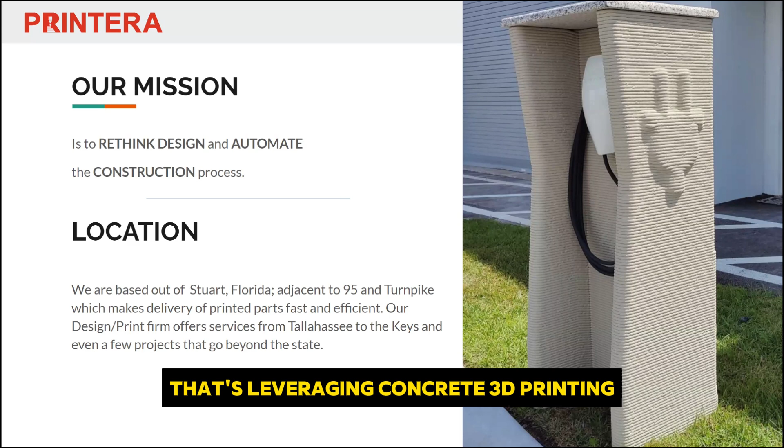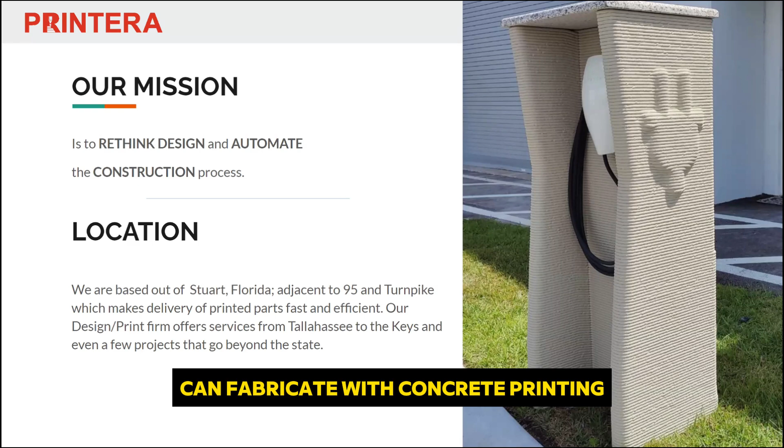As he mentioned, we're also located here in South Florida, so we're serving the entire Florida market. Projects, at least in housing, we're willing to go just about anywhere in Florida. And then, as you'll see in later slides, for projects outside of housing, we serve clients nationally. There's a lot of different interesting elements—even in this image you can see an EV charging station as just one example of something we can fabricate with concrete printing.

A little bit about ourselves and the background: we're in a very early, new, blooming industry. Even though we've only been around for about 3 years at this point, we're able to pretty much call ourselves veterans of this industry, just because of how new it is and how few players are currently operating in the space.

Over the course of that time, in combination with Centerforms, which is a company I acquired last year, we have a couple of interesting accolades. We did print the first permitted residential project in Florida, up in Tallahassee. I have a whole slide dedicated to that, and we'll explain a little bit more.

We engaged in a pilot project with the U.S. Air Force at Tyndall Air Force Base. We participated in the world's largest 3D construction printed building, which presently sits in Wellington, Florida. We'll see how long they hold that title, because there's some other stuff happening globally, so it's something cool to keep our eye on.

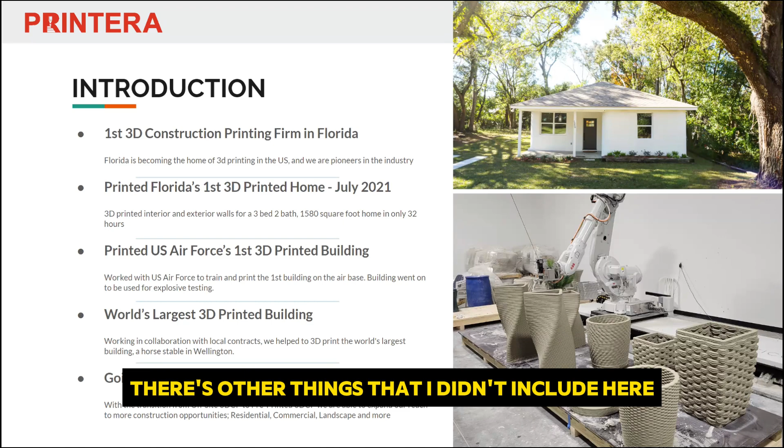Going beyond residential, there are other things I didn't include here, but we did deploy the first artificial reef in Florida, and we were able to do some commercial projects, like Florida's first 3D printed bar in Tampa that we produced. A couple other interesting elements as we go, but that's just a little bit about our background.

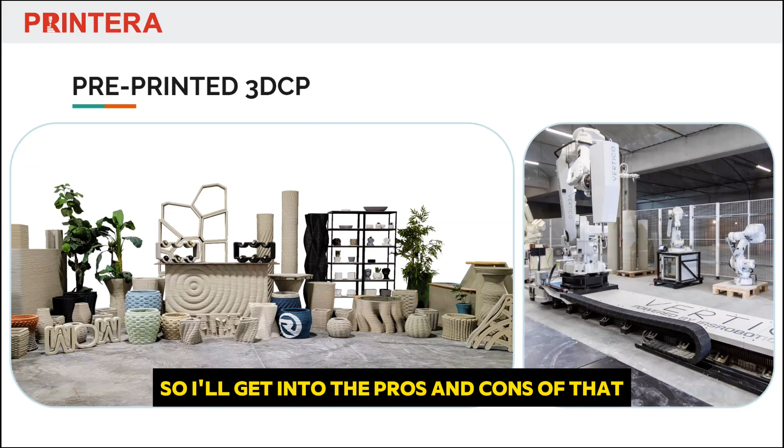What we're doing that's different from others is we're calling it pre-printed 3D concrete printing, which essentially means all the items you see in this image, as well as housing modules, we produce in a controlled facility in one location here in South Florida, in Stuart. What's important about that is we're not lugging a giant piece of equipment to a construction site and contending with all types of weather conditions and site-related hazards and delays. When you get your 5 o'clock rain shower in Florida, that's pretty typical—we're immune to that hurting us too much, unless of course the power goes out or something. Nevertheless, we have a little bit more longevity in our print cycles because of being in that controlled environment. I'll get into the pros and cons of that in the next couple slides, but that's the real key differentiator.

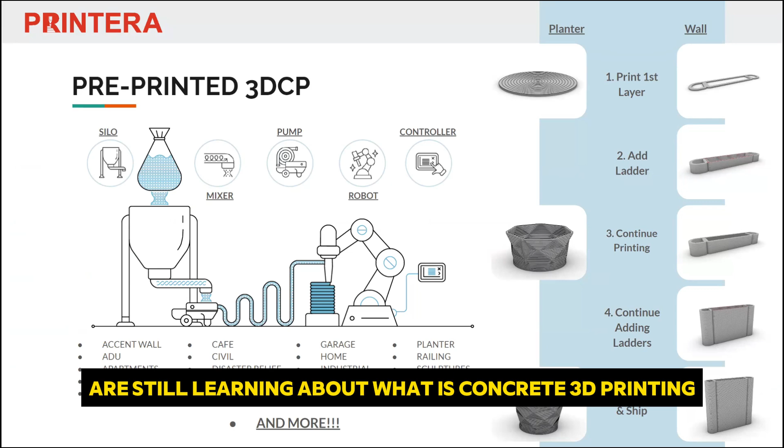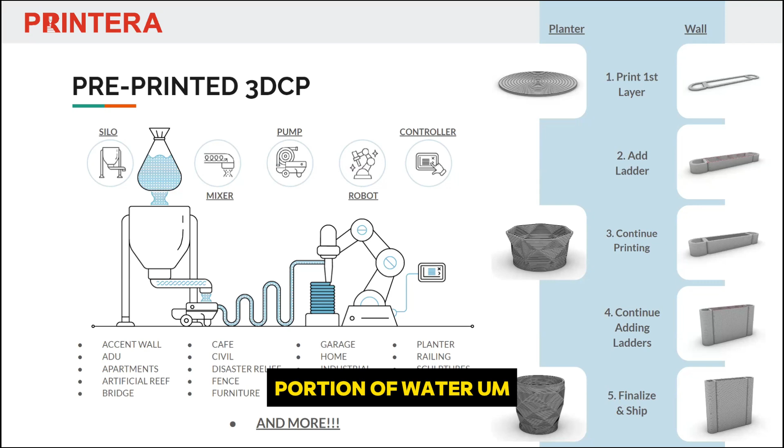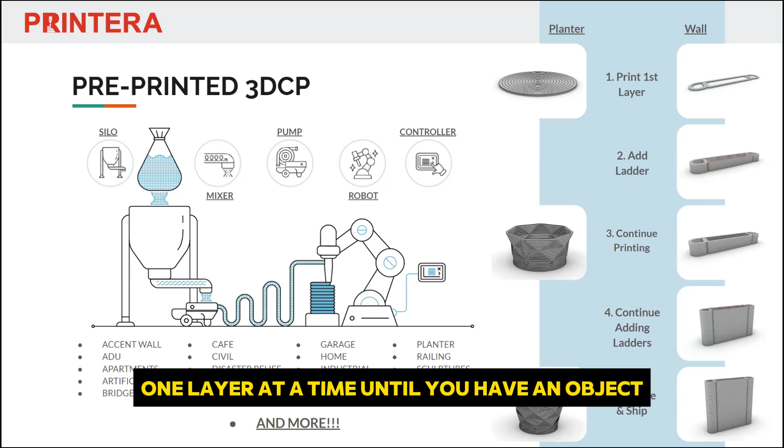I like to start at a high level because a lot of people are still learning about what concrete 3D printing is and how it works. At a fundamental level, it works the same whether you're using a system like mine or one erected on a construction site. Essentially, you're inserting a dry material mix—in our case, dry concrete—which is dosed with a fairly accurate portion of water until you get a pumpable slurry. The slurry is pumped through a hose over to a robotic extruder, and the extruder lays down the concrete one layer at a time until you have an object. That object could be something as simple as a planter or an entire wall segment for a house—it all depends on the scale of the machine and the capability of the material you're printing with.

One of the things we really pride ourselves on at Printera is bringing automation not only to the construction printing process itself, but also to the design. We do as much design algorithmically as possible, which means we can iterate on a design in seconds instead of having to go back and re-render items from scratch. Once we have a render, it converts into robot code, and that's what allows us to print.

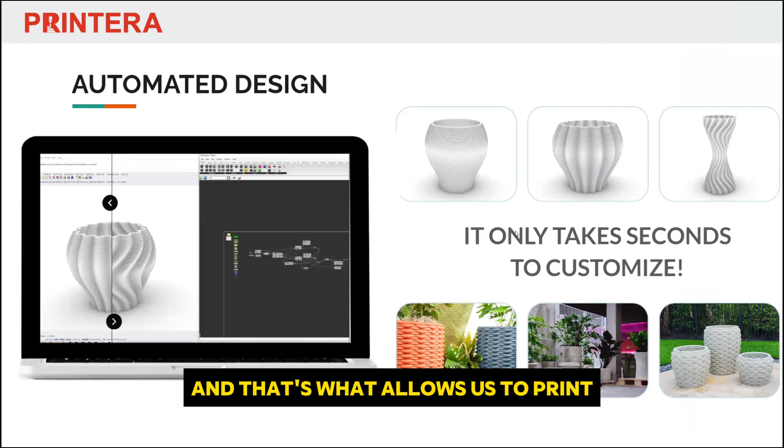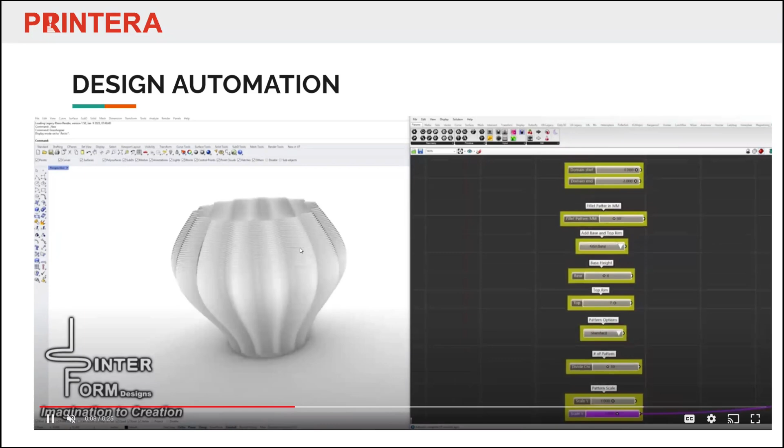I don't think the audio needs to carry through, but just demonstrating in real time this software we've put together on the back of Rhino—if a customer were interested in designing a planter, for example, we can change the pattern and the size in real time by just modifying a couple parameters. That same code can apply to wall modules, columns, you name it. It can be done procedurally and in real time, which is a fun element especially when interacting with potential clients who say, 'I like what you put forward, but I wish it was a little different in this particular way'—and we can do that very quickly.

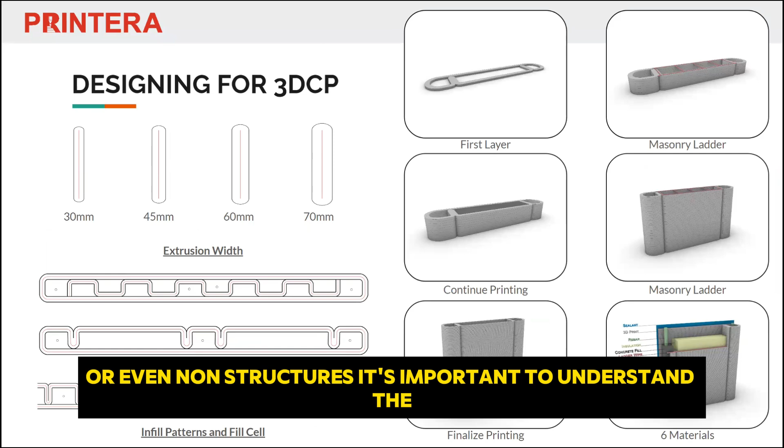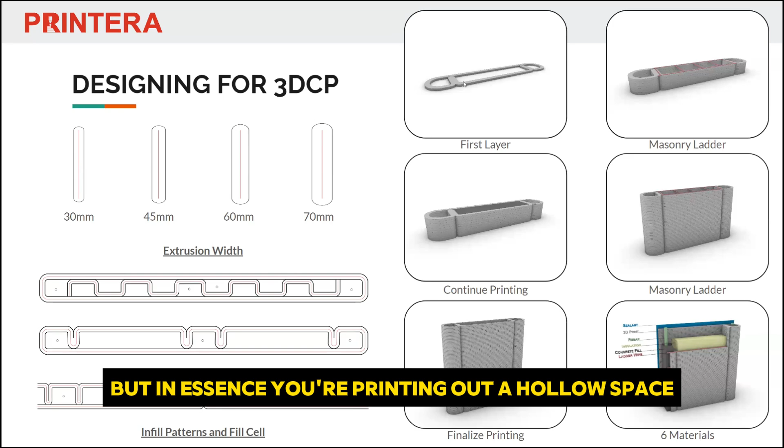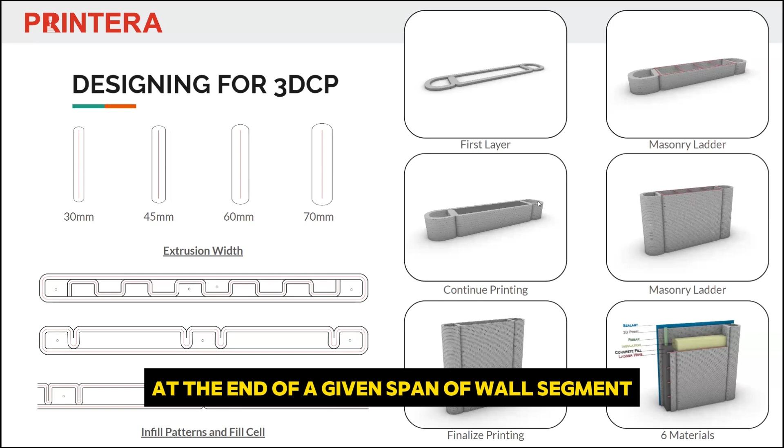The structural element actually comes from filling of cavities that we're creating over the course of the print. So in this example, at the end of a given span of wall segment, you have a cavity, and that cavity has rebar dropped in, then it gets backfilled with concrete.

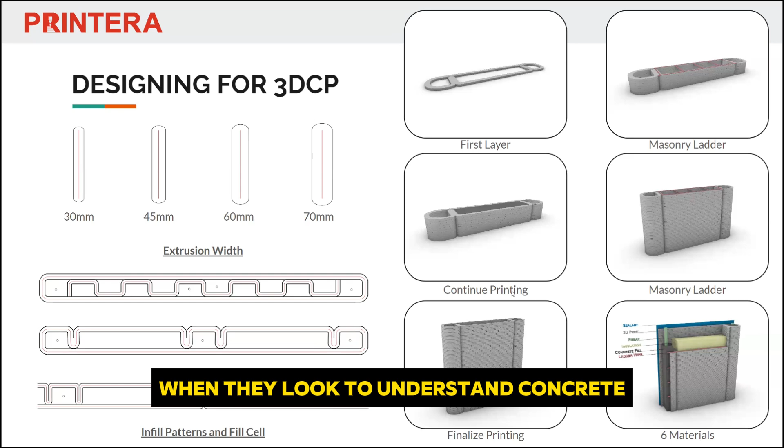That's what's going through the structure. That's what the permitting boards, townships and counties are looking at when they look to understand concrete 3D printing in construction applications. Now, the area between the void, you can go multiple different ways with it.

You can fill it completely with concrete and live in a complete bunker, or you could fill it with insulation, or fill it with all of your utilities and pass-throughs. So that's where the interesting nature of 3D printing comes into play.

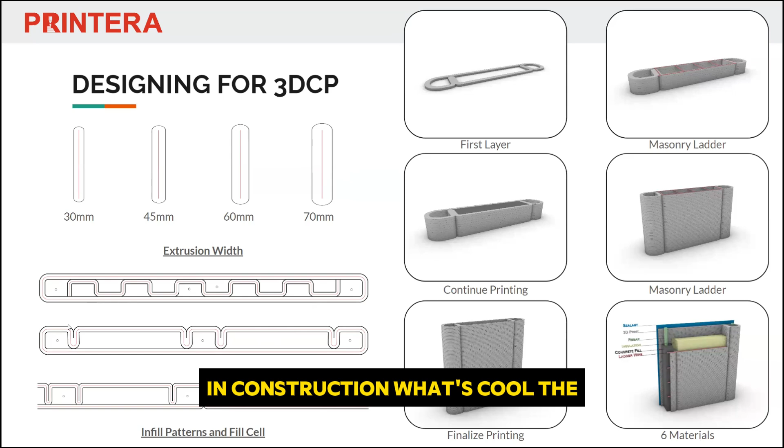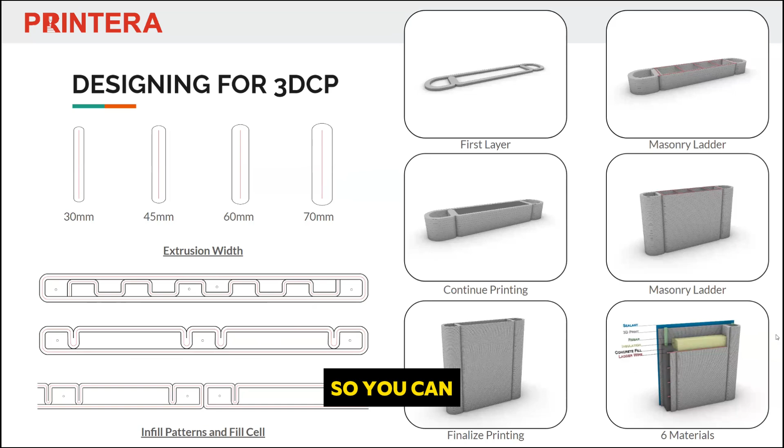Even though the examples you're seeing on the screen show straight walls, because that's what a lot of people understand in construction, what's cool to envision is that all of these elements can be done in any shape. As we go through the deck, you'll see we've done one wall segment that had a curve in elevation as well as in plan.

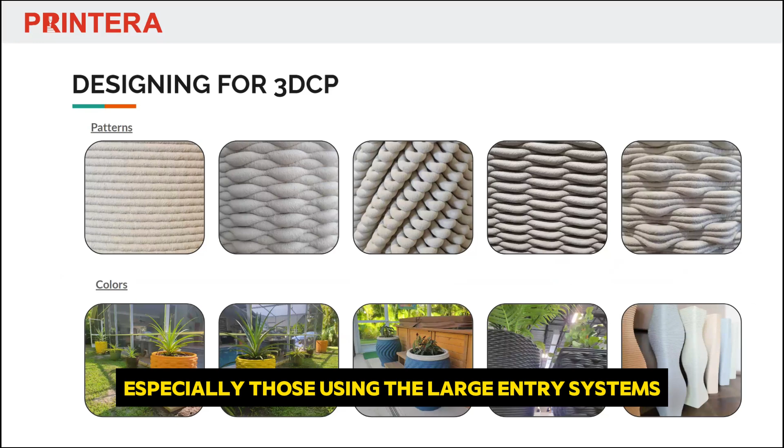And then the other element is just the aesthetic value. This is one area that we're setting ourselves apart from a lot of companies in the industry, especially those using large gantry systems, because we're using a robotic arm in a controlled environment, we have a lot of quality control. Over the course of a print, we're monitoring 17 different metrics in real time to adjust if conditions change, even in the warehouse, or recognize any issues that might be occurring before they make their way into the ultimate print.

So here you're seeing patterns as an example, right? Whether it's straight line, which is indicative of most concrete printing, or you can do things like weaves and loops and different elements like that.

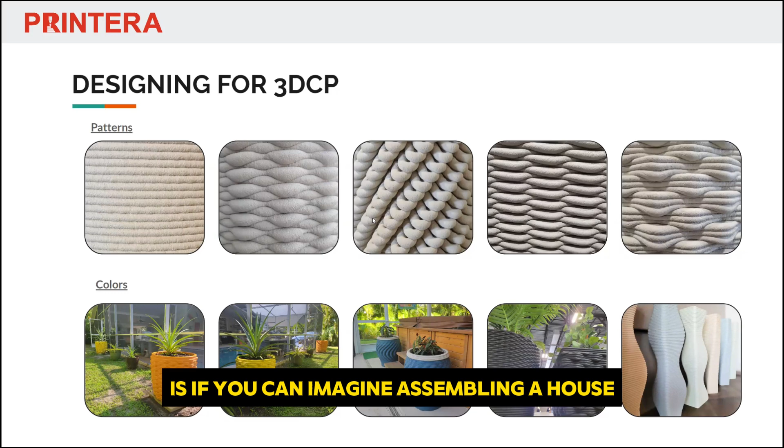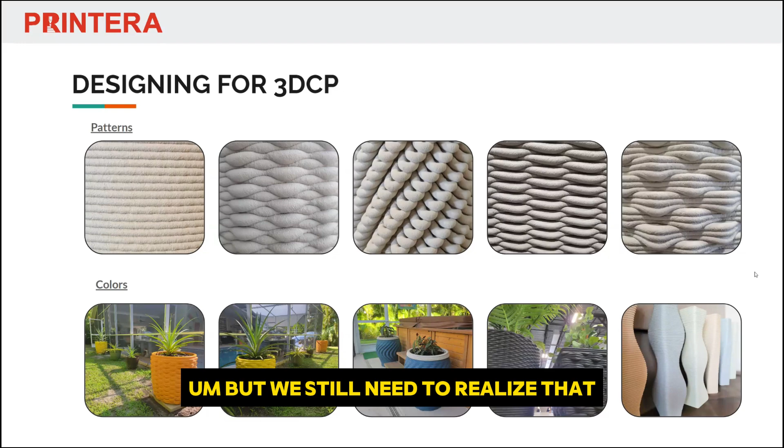And where that really comes into play in construction is if you can imagine assembling a house where you have this pattern on the outside, you can now take stucco out of the equation of the house. If you spend a marginal amount of difference in material to create a little extrusion and that pattern, versus having a stucco team come cover the house completely with stucco, there is a savings element here, but we still need to realize that in the broader scheme of the grander picture.

Back to explaining how we work from a pre-printed standpoint. Again, this is part of that world's largest 3D printed project. We did all the columns for that job, and I like the way this came together to show the timeline of progression.

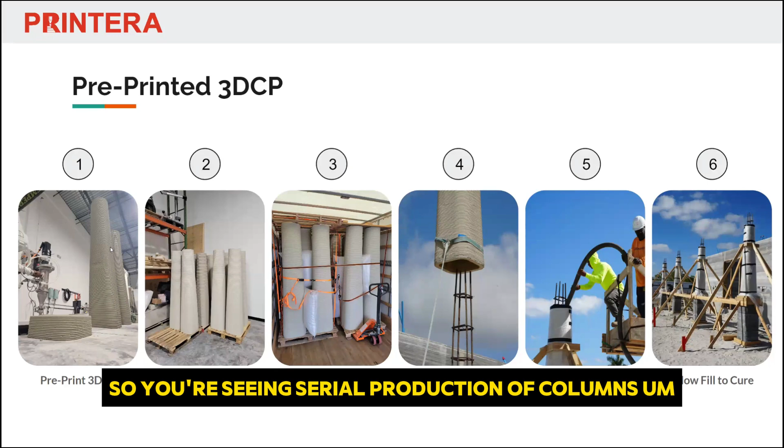But basically, we produce in the warehouse, so you're seeing serial production of columns. They have to cure, any concrete element needs to cure, whether it's precast or 3D printed. Our curing is a little bit accelerated, we tend to hit about a 3,000 PSI strength within 24 hours. So for something like a column element, it could ship same week or early the following week. It gets delivered to site, and at that point it's in the contractor's hands.

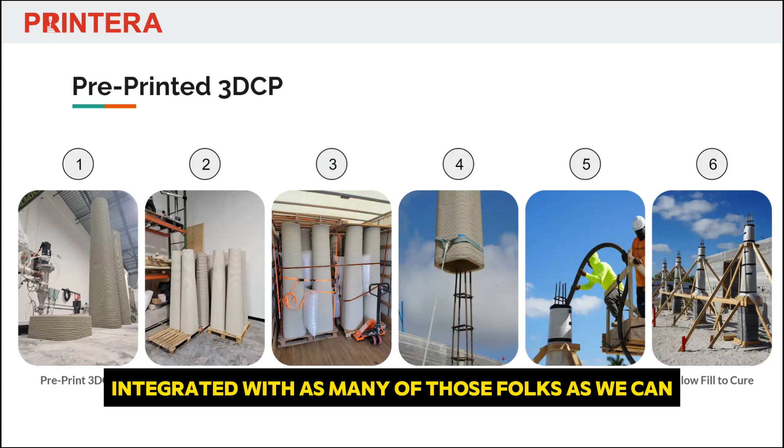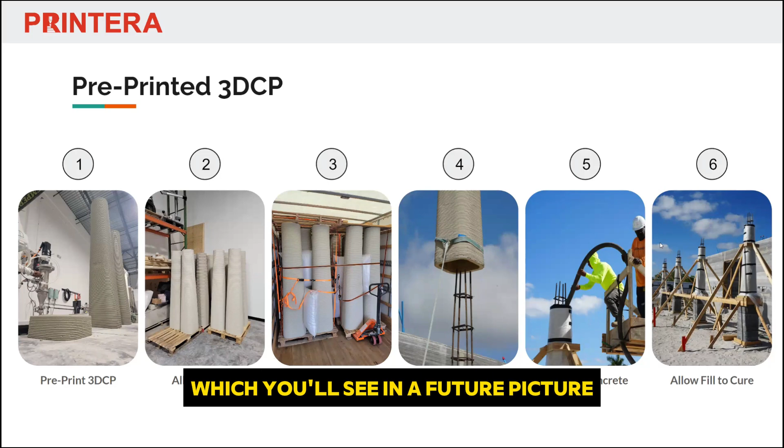So we're a building material supplier, we're not general contractors and we're not installers. We want to get integrated with as many of those folks as we can. But the great thing for them is that the installation of these columns becomes very simple. They drop it over a rebar cage, backfill it with concrete, and now you have a structural column, which you'll see in a future picture is now holding up the bond beam of this particular building.

Hey Justin. Yep, for us, I guess contractor or construction folks...

What's the difference between a CBS strength wise from just a regular CBS construction and what you're talking about? Because if I heard correctly, you're in the thousands for density. So I'm not exactly sure, but my understanding is that's a significant difference.

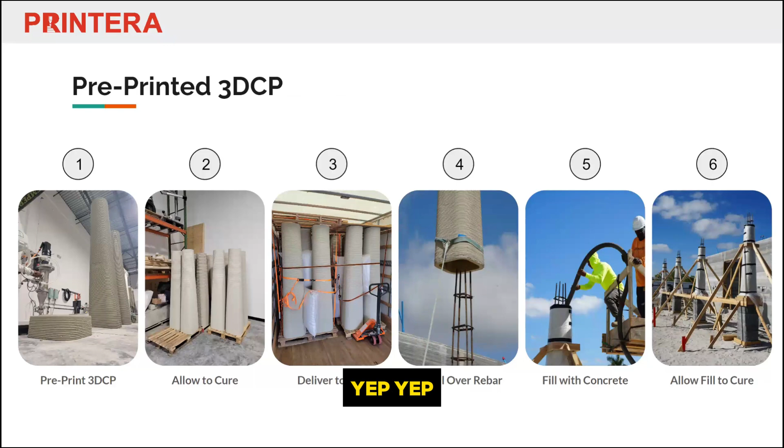Yep, absolutely. So CMU block, that's our building material of choice in Florida. It tends to come in somewhere between 2,000 and 2,500 PSI compressive strength.

So very key is its compressive strength. Whereas the concrete that we're using that's designed specifically for 3D printing comes in anywhere from 5 to 7,000, depending on how much accelerant we hit it with. So you are talking at least a 2-time strength, 2 times over in strength from what a block would be.

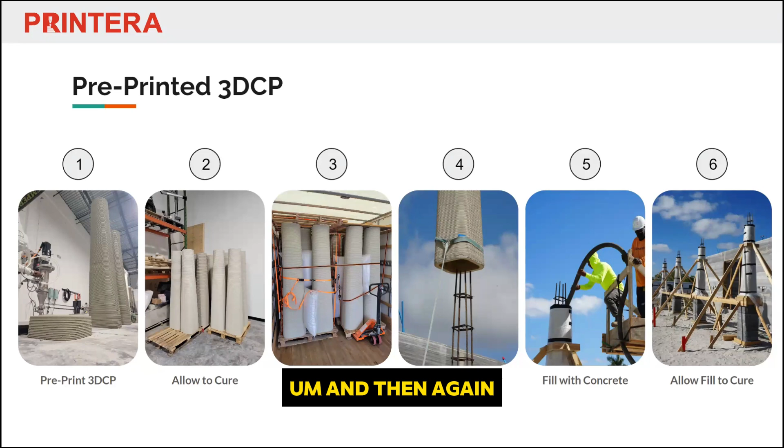And then again, the structure of your house comes from filling those cells. So when engineers are looking at it, they care more about the fill cell, right? And what you're dumping into that, making sure you've got the right rebar gauge and everything in there. But it's still nice to know that the overall structure of the house, all the aesthetic elements and what are making up your walls, is stronger.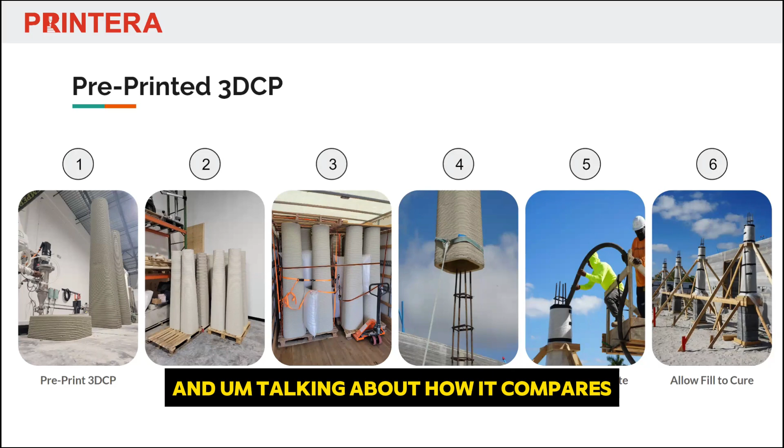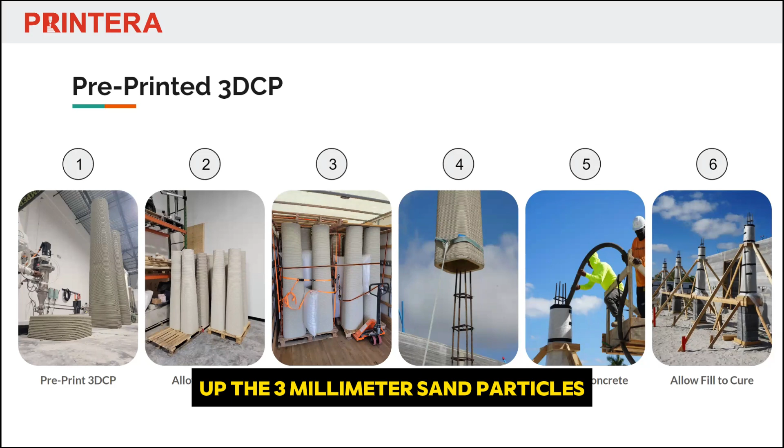And talking about how it compares to block, the concrete that we're using is actually very dense. So there's no large aggregates in it. The largest aggregate in the mix is the sand particles themselves. I've seen some mixes with up to 3 millimeter sand particles, but that's about the largest you'll ever see. And so you can imagine if you took a piece of this concrete and broke it and looked at a cross section, you'll see a very compacted, very dense piece of concrete.

And that's also very good for resisting water permeation. So if you're still doing construction with traditional rebar modules, for example, with that thicker, more dense concrete, you're giving it some more longevity because water shouldn't be impregnating the concrete.

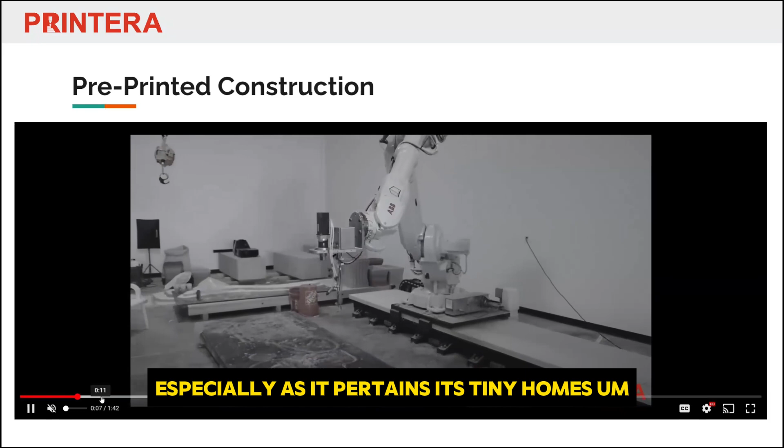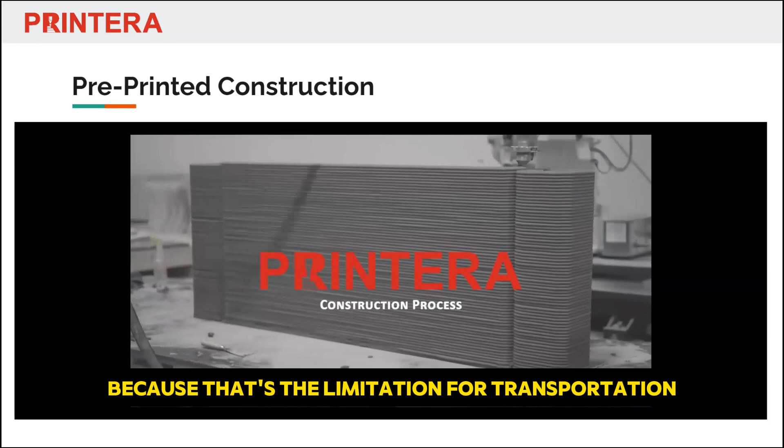Just to illustrate very quickly what an overall construction project looks like for us. As we mentioned, especially as it pertains to tiny homes, we print the wall module in our facility, which is what you're seeing here. So we do them in panels up to 8 feet long, and then we can go up to 10 feet tall because that's the limitation for transportation. We generally like to go a little smaller, and then those modules get brought to the construction site where there's already a cured slab with exposed rebar ready to receive the modules.

So think of a general contractor, instead of ordering up 6,000 blocks to make a house, they'll order up like 15 wall modules, and a telehandler will drop them into place, and the whole thing will go together in about a day for something as small as a tiny home footprint.

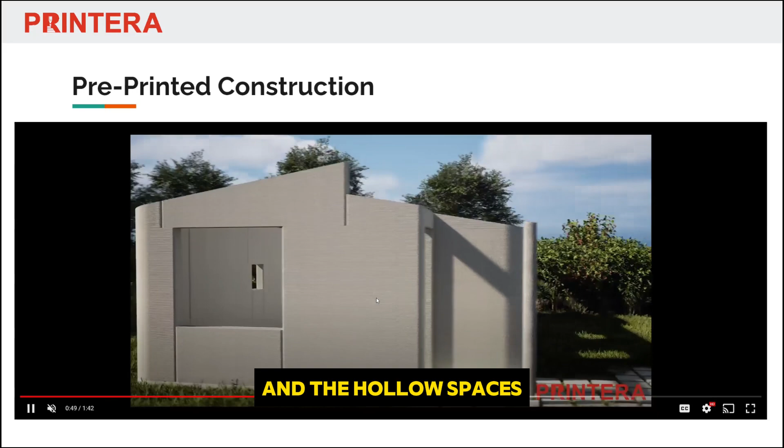And then here you're seeing that the cells get filled and the hollow spaces. And then what we're also often asked, and you'll see its inclusion in this video, is, well, what if you don't like the look of the 3D print layer lines? And you want something more traditional, particularly on the inside of the house, where people are used to having drywall. It works just like block.

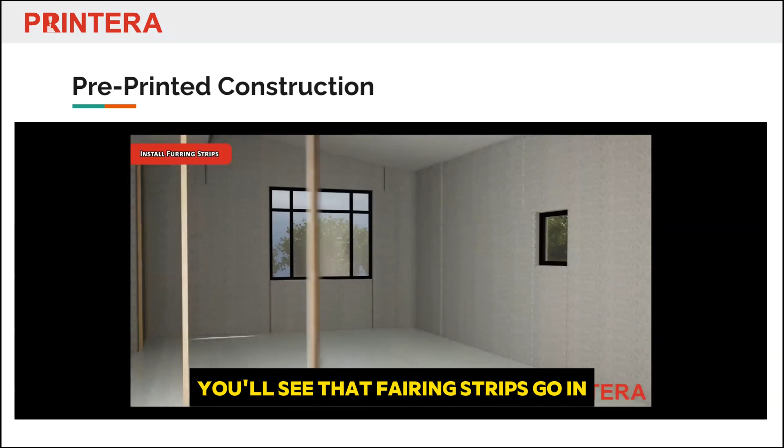You'll see that furring strips go in, which is what you're seeing now. And then with the furring strips, you could run utilities on the surface instead of through the cavities. That gives you another element of flexibility.

Your insulation, and then you finish it off with drywall. And if you didn't know any better and you were standing inside a house that was finished that way, you wouldn't know it's 3D printed. So you've got a lot of flexibility on either end. You can go extreme 3D printing and save some money and just have different layer lines exposed on the inside of the structure, or you can go crazy and stucco the outside and drywall on the inside. So it really gives you a lot of flexibility.

That design, Justin, is about 750 or 800 square feet. Yeah, so that design is actually for a tiny home printing company in Minneapolis. So that is their design. They designed it 850 square feet, I believe that model is. And you may be right, it might be 750. I got to take a look at their inventory. But yes, that essentially is what that is. It's 2 bedrooms. And you can find a lot more information about that.

Another element that Ray touched on that we think is important is what's our environmental impact as we use this material. Concrete gets a very bad rap internationally, just because it is the world's most, or second most, used construction material. And I think it only falls in second place when people consider water as the first.

So what you end up with is a lot of negative press on how this impacts the environment. But the reality is, when you look at it on an individual basis as a material versus any other material, it's not that far off, right? Something like wood frame, or if you want to use any other method, outside of like pumping clay and rammed earth.

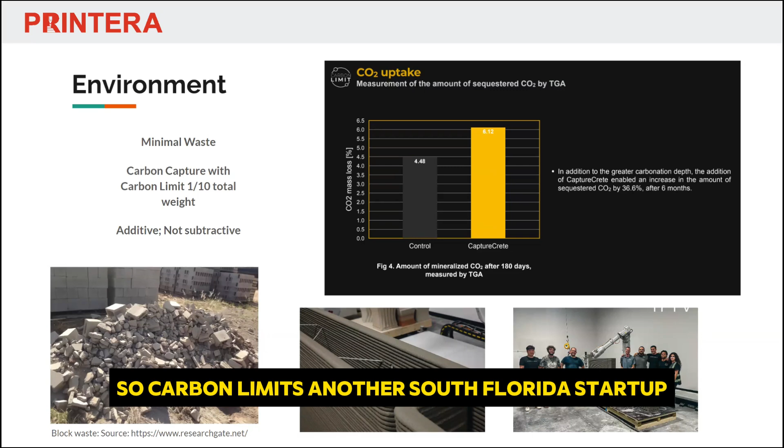Now, Ray alluded to this a little earlier, and this is something we're very excited about, but we piloted an additive with Carbon Limit. Carbon Limit is another South Florida startup, and they came up with an additive that goes into the Portland cement, into the mix, and it turns the concrete into a CO2 absorbing concrete. It's like it acts as a sponge, and it sucks up CO2 out of the atmosphere and permanently sequesters it into the concrete.

And more so than just that feel good factor, it actually gives it self-healing properties like Roman concrete, because the CO2 that moves in hits that additive, and the additive calcifies. So now you've got a calcium rich concrete. And if you have micro cracks, next time it rains, those cracks fill up with that calcium, and it gives it that self-healing property.

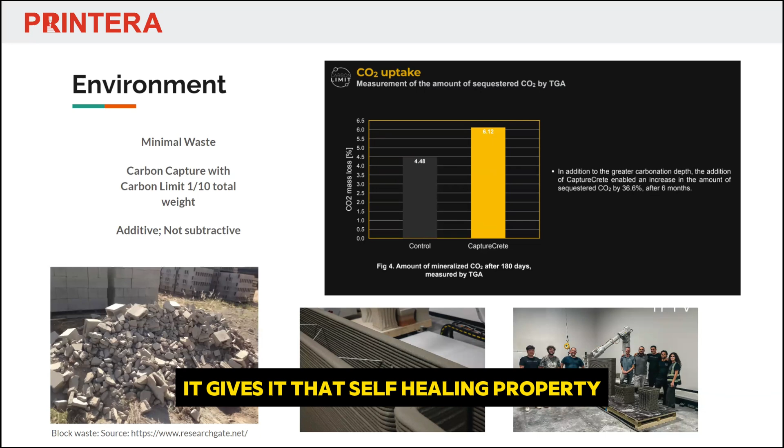So we piloted this with Carbon Limit into a wall module, and they went back and did some lab measurements, I think after 30 days and after 180 days. And we see that the capturecrete absorbs substantially more carbon than the control. It also gave us higher strength numbers. So it's kind of an interesting thing. It's all working towards becoming carbon neutral, or even potentially carbon negative, for the structure.

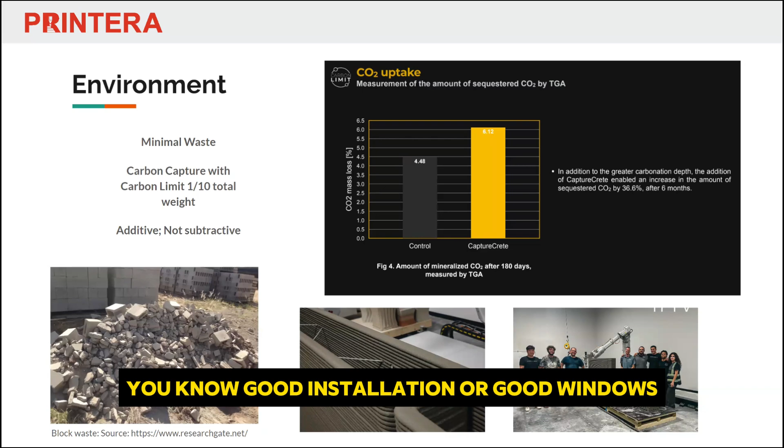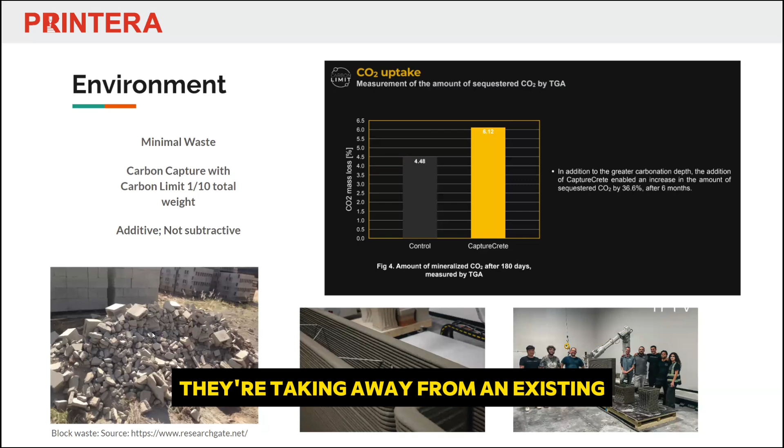And when you factor that in with other environmentally friendly elements, like good insulation or good windows, you could end up with a really good structure that has a very minimal environmental footprint. And then, as we mentioned, it not being subtractive is important, because anybody who's built a CMU house knows this pile of rubble. And even this one's kind of small, but every time they knock something out or need to cut a block, they're taking away from an existing method. They're subtracting. So we're additive manufacturing as opposed to subtractive.

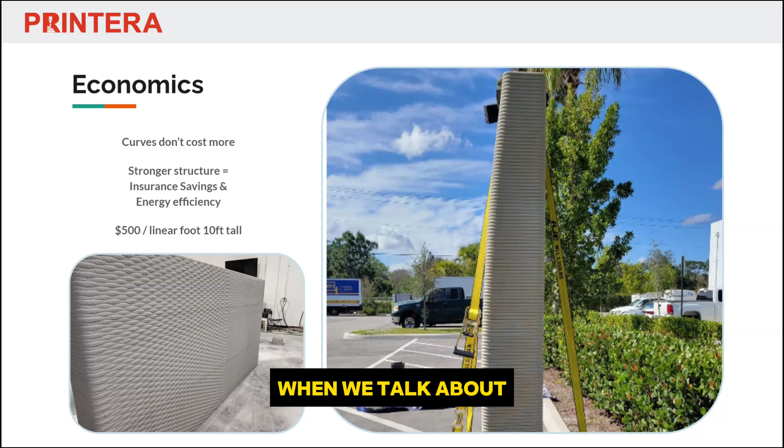And outside of the pictures, the point of this slide though is to talk economics. When we talk about why 3D printing is an economical choice, the reality is today it's still on the journey of becoming the most economical option, but it's not presently. But it has a couple things going for it.

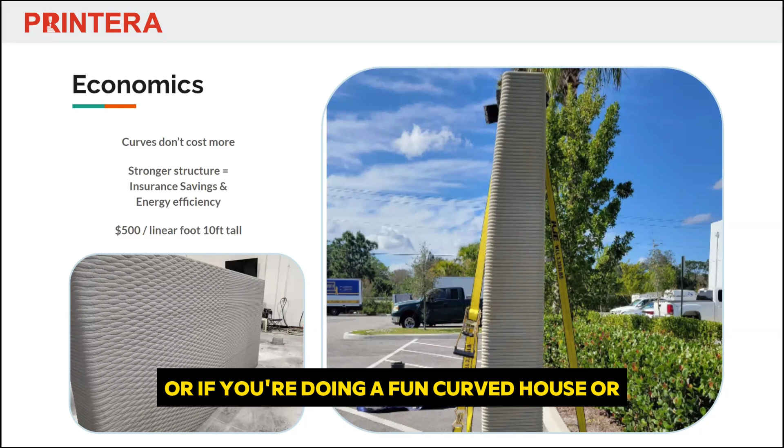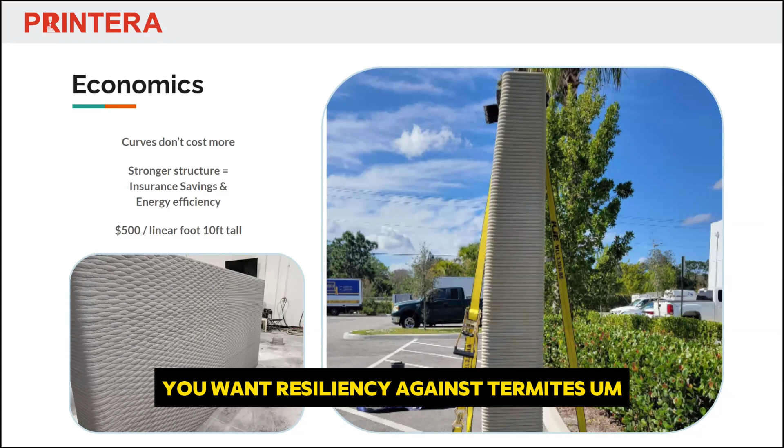So the first is that curves don't cost more. The robot doesn't care if it's printing a straight line or if you're doing a fun curved house or perfectly circular house. In traditional methods, if you want a curved block, you're paying specialized labor at a significantly higher rate. So that's somewhere that even today 3D printing will blow the competition out of the water. And you also end up with a stronger structure. So in Florida, as an example, you want resiliency against hurricanes, you want resiliency against termites. To some degree, you want resiliency against vandalism, particularly if you're dealing in rental properties.

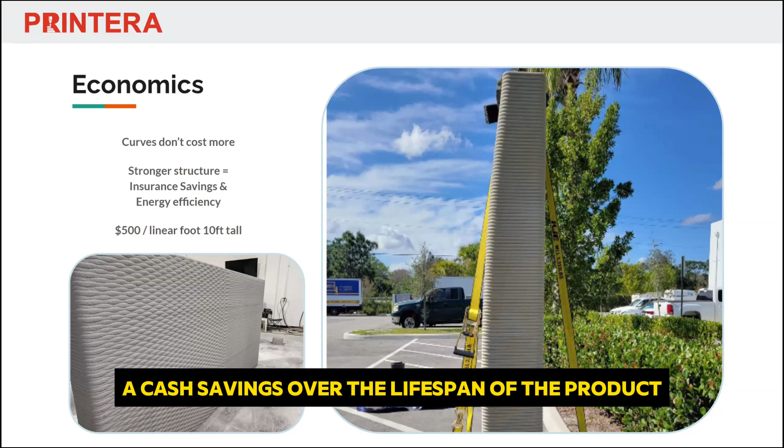So there's a cash savings over the lifespan of the product that's not immediately realized up front, but there are other elements that you put in, and we have yet to find an insurance adjuster who doesn't love concrete printing, because even if you want a house with straight walls, you can add a curve to the end, right?

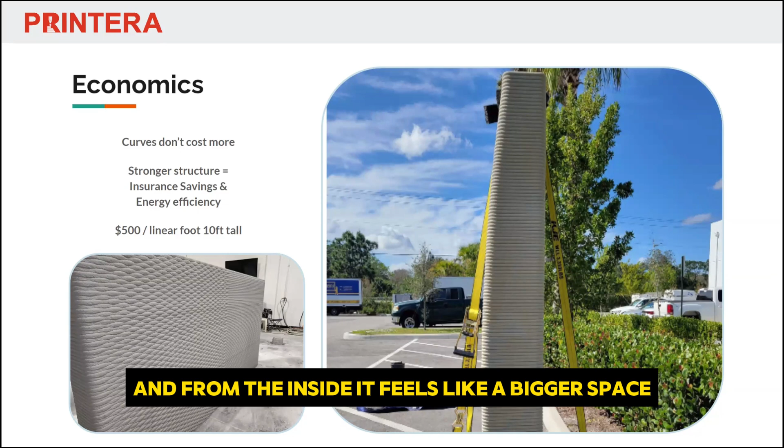Because we can't print a hard corner, typically we have about an inch or two of radius, and what we tend to do is we exaggerate that, now give the house a foot radius. And from the inside, it feels like a bigger space because you don't have a corner casting a shadow. And from the outside, the wind just moves around it, it takes on a really nice aerodynamic property.

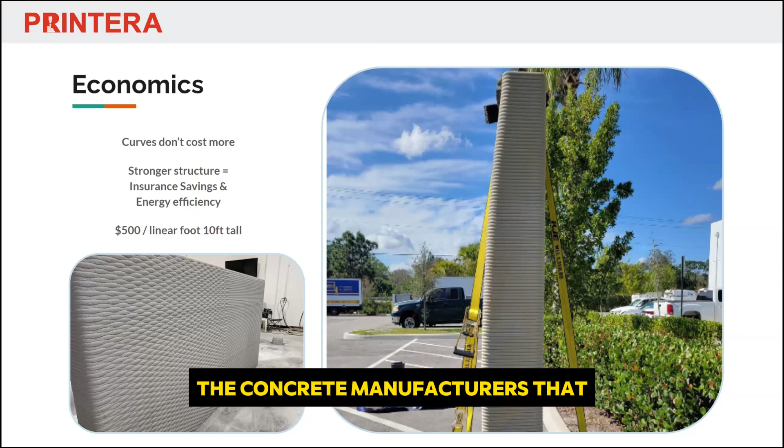And then everyone's always asking, well, how much is it today, right? So what we typically say is it's about $500 a linear foot for a 10-foot wall, and that can move up and down. We think that in the next couple of years, there's a track to being able to reduce this by another 40 or 50%, and that would probably be the final number with volume. But right now we represent such small volumes to the concrete manufacturers that the reality is we're about $500 a linear foot. Now, for high-end construction where you're going to stucco it over anyway and put furring strips and all that stuff on the inside and drywall, it's not the economical solution.

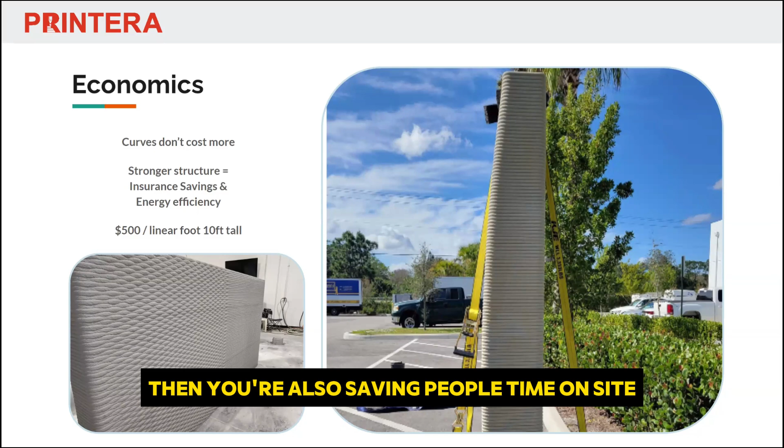But if you can cut those other elements out, now you don't have drywall at all, you don't have stucco at all, and you can already do the electrical pass-throughs and utilities in the concrete module, then you're also saving people time on site. Now you're into the range of saying, hey, this is a really economical option.

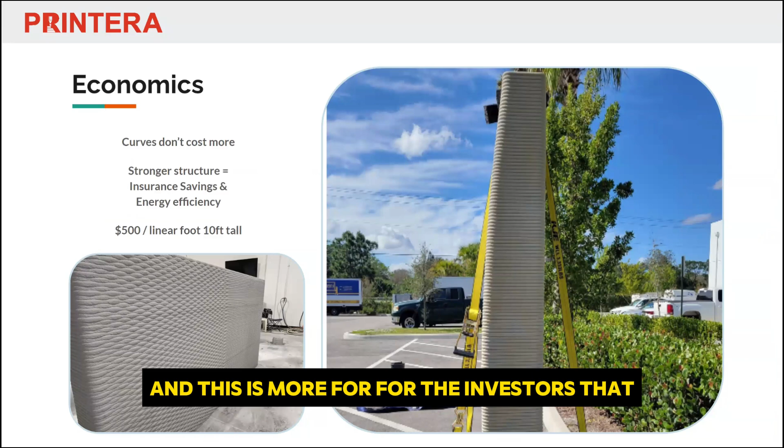One thing, Justin, I would comment on there, and this is more for the investors that are either here or going to listen when we post this on YouTube. But what we're talking about when we talk about these smaller footprint homes, we're not talking about low income. I mean, it doesn't necessarily have to be low income. We're just talking about being able to take something that is really nice, just reducing the size of it.

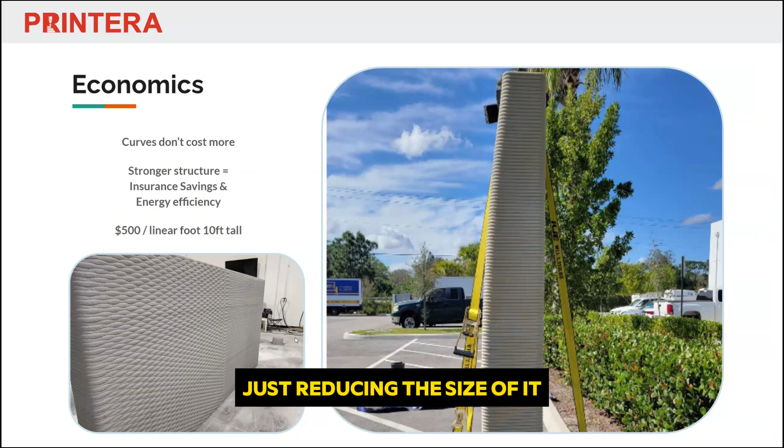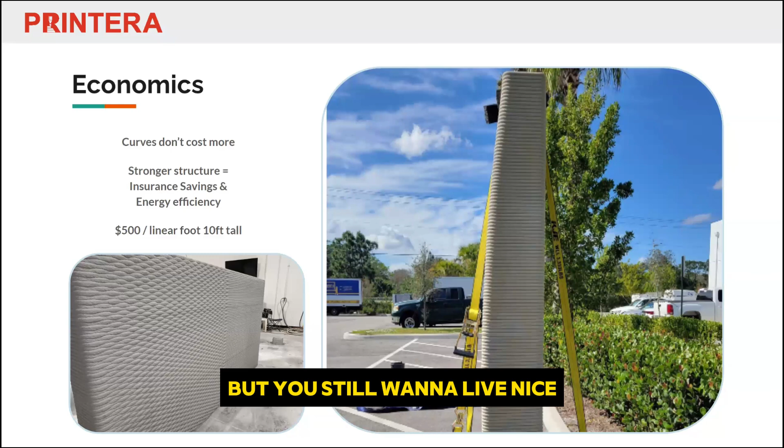And the reality is, if you're a couple and you're downsizing from whatever family you had to now it's just you and your spouse, you don't need 3,000 square feet, but you still want to live nice. You still want design elements in your home, you still want to have the protection and the resiliency, etc. So I think that's what we're looking at. I'm not necessarily - although this could be a good project for just cutting costs to the bare bones - it's more about taking something that is nice, maybe not the cheapest, but the cost is lower just because of the size of it.

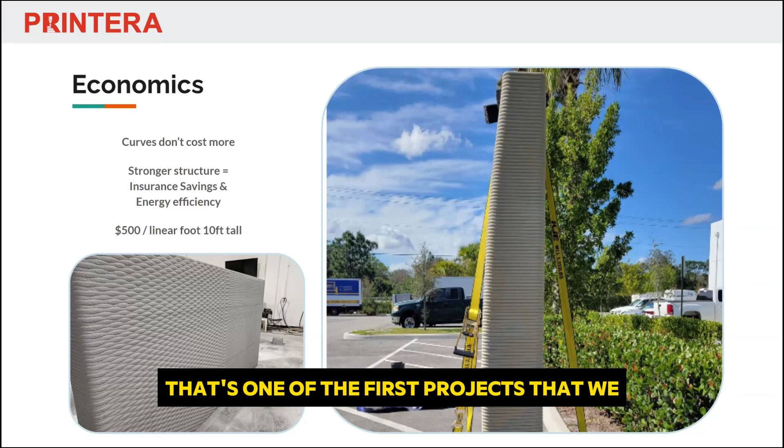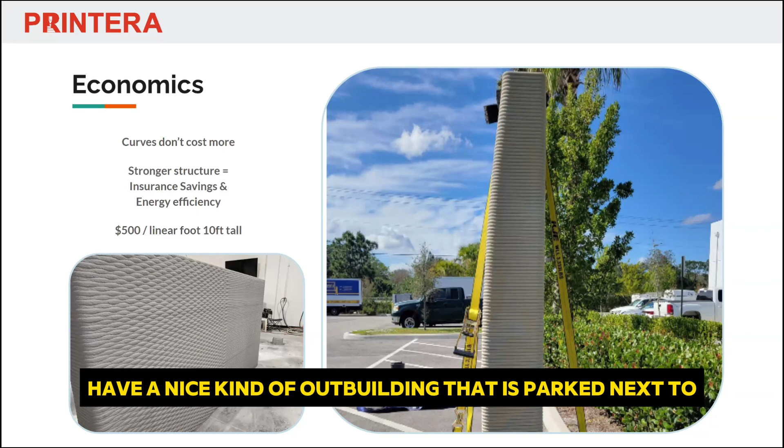Yep. And a perfect example, that's one of the first projects that we were asked to participate in. The development company wanted to produce a series of tiny homes with RV pads, right? So the idea would be it's an RV park and people can bring down their large, very expensive RVs and have a nice kind of outbuilding that is parked next to, and they can spend some time living in an outbuilding next to the RV.

And then when they leave for the season, they know that they've got a resilient structure right here in Florida. They don't have to worry about when the hurricane comes through that it's going to take any damage. That project ultimately, the developer of that project ultimately thought we were going to pay for the whole thing, so that fell through. But it was still a really good use case in being able to put forward designs and concepts and kind of walk through all the intricacies of a project like that. And we think it had some real potential.

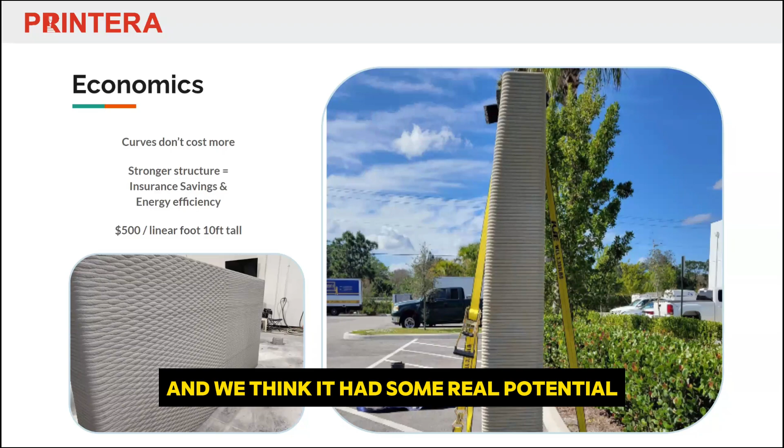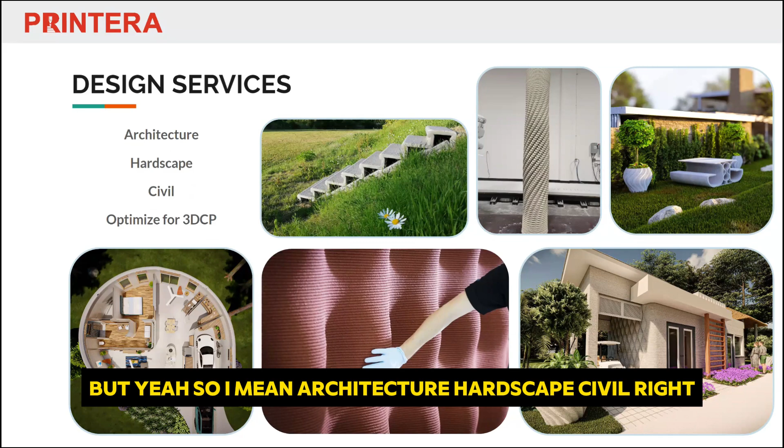But yeah, so I mean, architecture, hardscape, civil, right? You can do all different types of things optimized for 3D. Anything you find in a high footprint or a high foot traffic commercial environment, concrete's a great material for that just because of how robust it is. So you look at park benches, you look at high-end planters and landscape elements.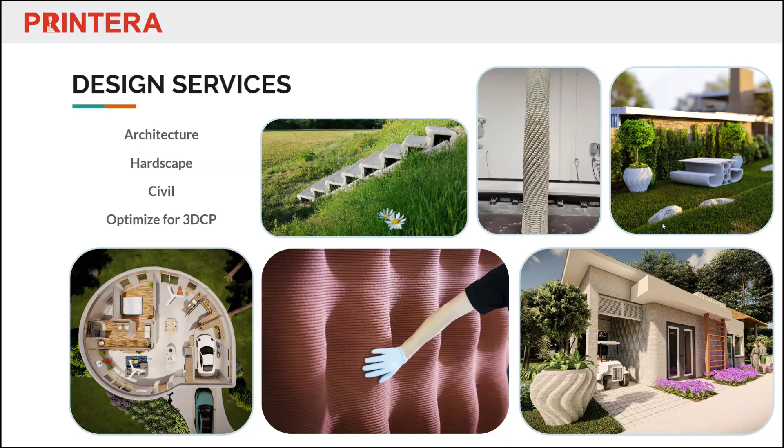We've seen a couple companies implement these stairs as an interesting element. So yeah, this is just examples of things you can do.

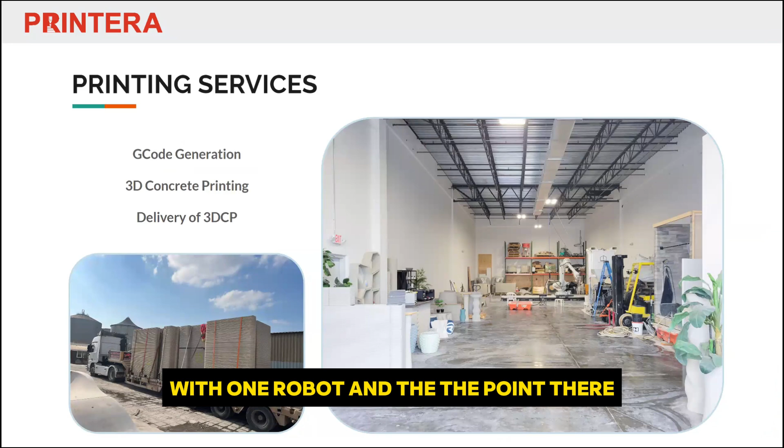As far as our facility, I wanted to give a little window into how we do things. You see our robot in the back there. It's a relatively humble facility with one robot, and the point is we keep our overhead very low. That's another element of achieving good cost comparisons - it really takes only 2 production workers to run the entire facility. We have run it with an individual production worker; it's definitely possible, but we keep 2 just for safety purposes. When you're working with a robot, it's good to have somebody else there, especially with heavy concrete. Often one worker is running production while someone else handles emails or packaging. So it becomes a very lean manufacturing operation.

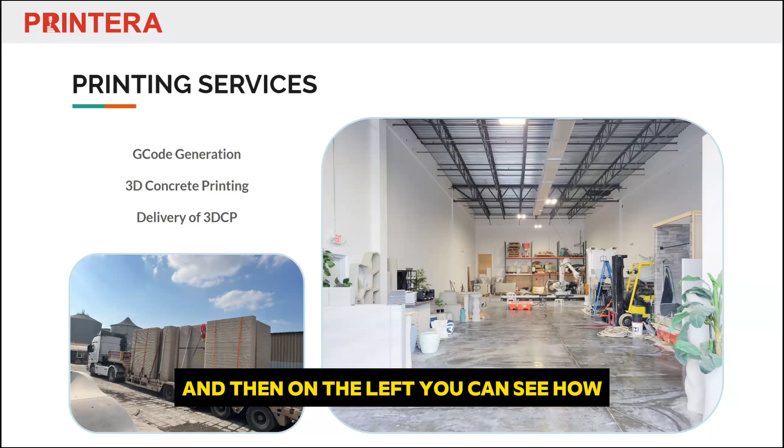And on the left, you can see how the wall modules are transported by truck to the site for ultimate installation. So a lot of cool things happening there.

We started talking about the Clay Street house up in Tallahassee. That was the first 3D printed home in Florida, done by Printed Farms and Centerform - Centerform being the company that I acquired. I wasn't on site directly for this; my business partner, Justin, was. But I know all about it. It was 1,580 square feet.

In addition, it was 32 print hours, but they had a couple days where they were printing and all of a sudden it started to rain, and they only got 30 minutes of printing in before having to shut everything down. So we were looking at the challenges of printing on site, and whether there's a better way. And we have the better way.

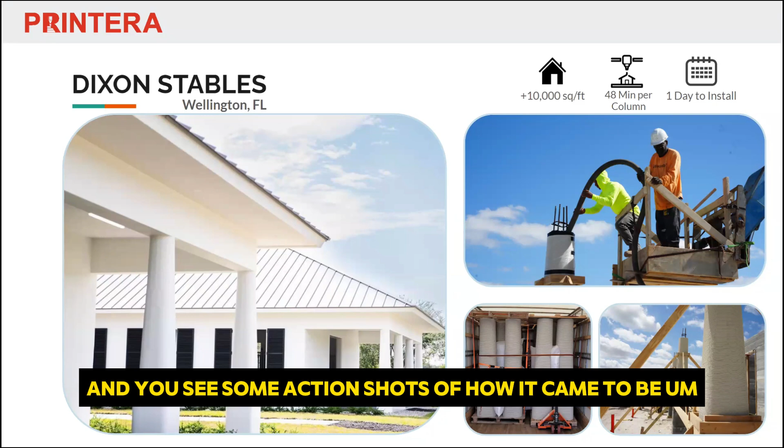This is the largest 3D printed structure globally - the Dixon Stables in Wellington, Florida. It's nice to see a finalized picture of it with all our nice columns holding up the building, and you see some action shots of how it came to be. The fun fact, and something that sets us apart, is the print quality. Using a robotic printer with finer layers, we're able to achieve a finish detail that's good as a product on its own. A lot of companies can't put out that type of quality.

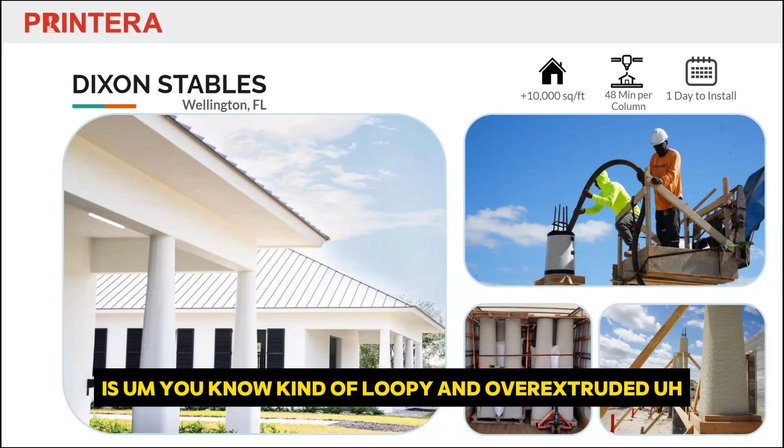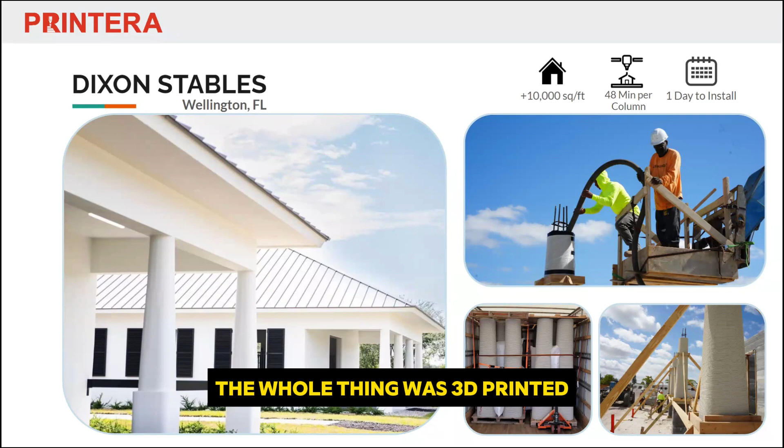If you look at a traditional 3D printed house, you'll see every fifth layer is kind of gloopy and over-extruded - it doesn't give a pleasing aesthetic. But we have extreme layer consistency and quality, to the point that this stable was entirely 3D printed, and they ultimately covered everything with stucco except our columns. Our columns just got a coat of paint. If you were to visit the stable now, that would be the only nod that this thing was actually 3D printed. So it's a cool feather in our cap and something we like to talk about.

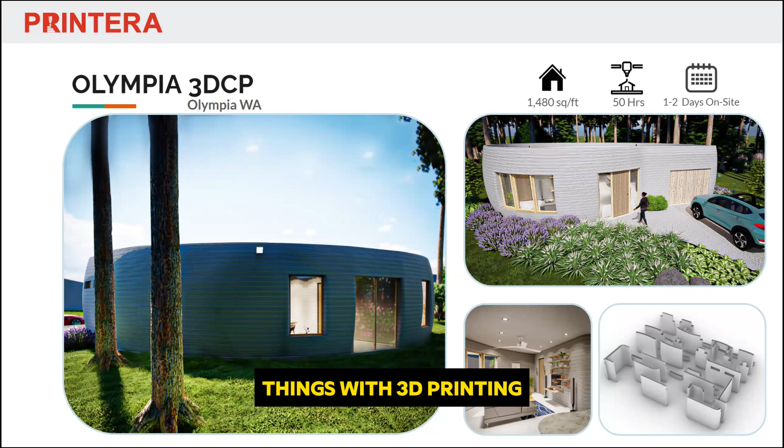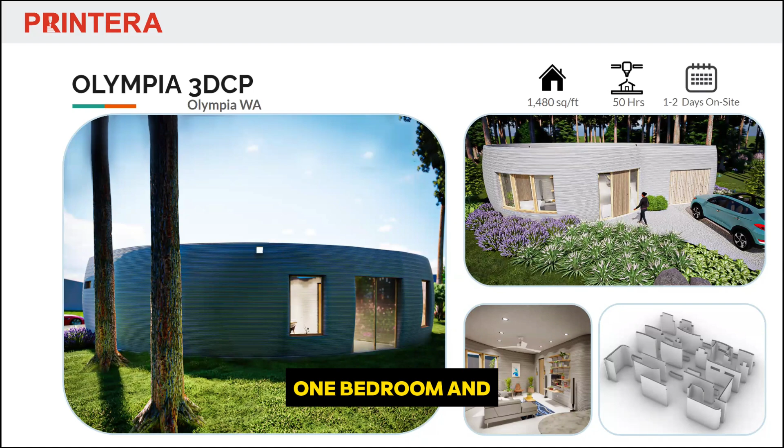This is the house that the curve module I showed you earlier is going towards. This goes back to the idea that you can do really interesting architectural things with 3D printing. This whole house was made to resemble the Fibonacci curve. It's a neat house, 1 bedroom, large 1,480 square foot bedroom. And here's how all the modules would go together to assemble that structure.

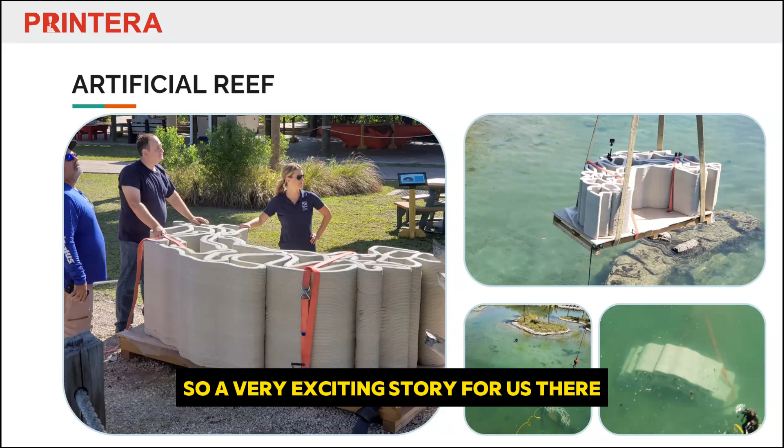I mentioned at the beginning the deployment of Florida's first artificial reef, a 3D printed artificial reef. These are some action shots. It was specifically designed as an archway so that turtles with buoyancy issues from boat propeller strikes can get up under it and rest. Only 2 hours after it was submerged, turtles were already on it and figured it out. The Oceanographic Society, who received this reef, were so happy they came back and ordered a couple more modules the very next month. A very exciting story for us.

This is the next Florida project we have in the works. We're calling it Print Deco because it's in a similar style to Art Deco, with a lot of curves and a round window, for example. The family that commissioned this has since redesigned it to be a single story instead of multi-story. That project is hopefully slated to commence before the end of this year.

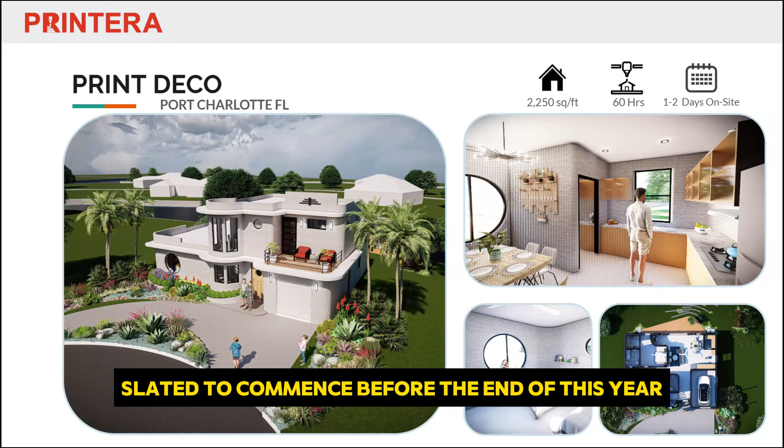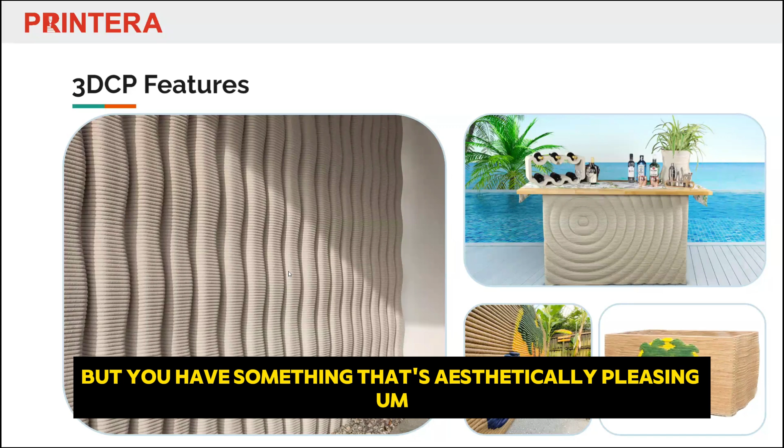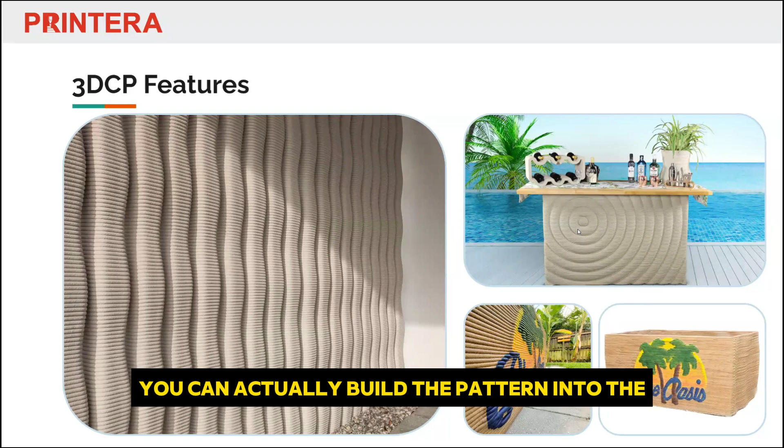We're nearing the end, but I wanted to call your attention to some other interesting applications. Things like privacy screens that could hide trash receptacles, dumpsters, pool equipment, or a generator. There are interesting elements where air still passes through but you have something aesthetically pleasing. And in these images, you can see the extrusion of logos or different design elements. Even without oscillating the nozzle to create the pattern, you can build the pattern into the object itself and come up with something really artsy and unique.

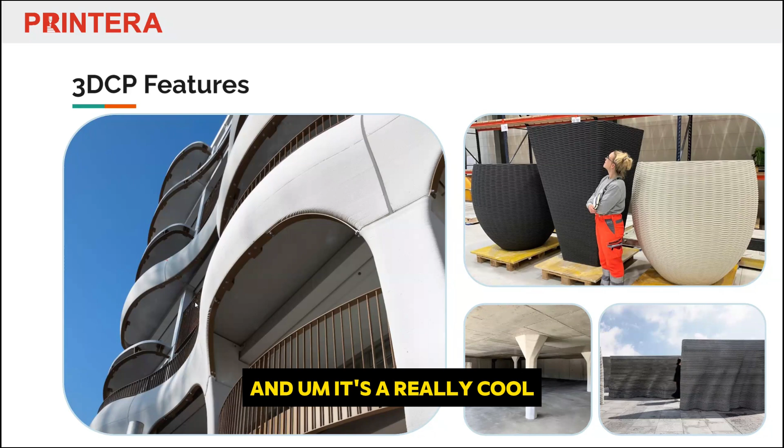A couple images don't belong to us, but I wanted to include them because it's a great accomplishment by the company that did this, called Brill. They took an existing multi-story residential unit and added this concrete 3D printed facade to take it from just a regular rectangle to something with flowing geometries. It's a really cool application of how this can be used in more of a city or urban environment than just typical single family homes—architectural columns, large planters, things like that.